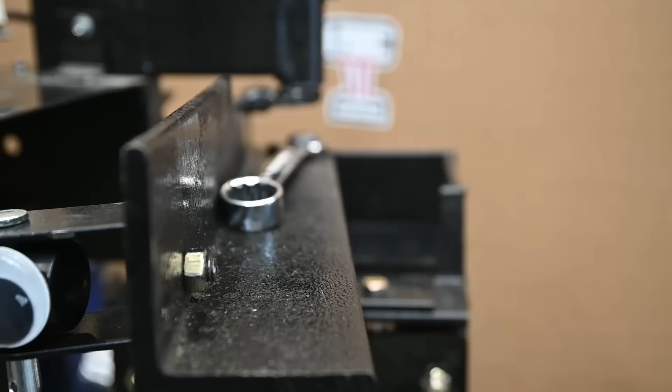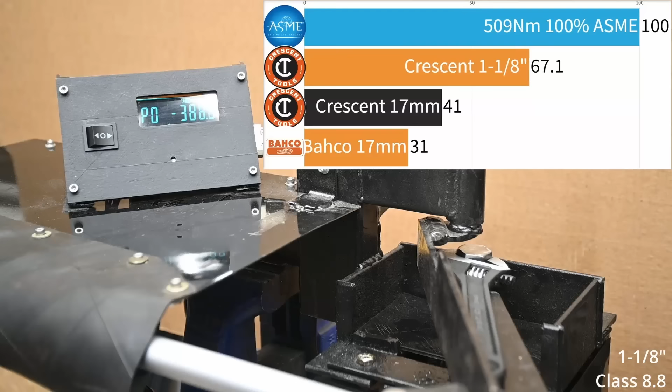ASME tool engineers expect 509 newton meters, 375 foot-pounds out of these tools. Today we see, can any of these actually do that? But mostly, a lot of the testing we do here is to measure slipping.

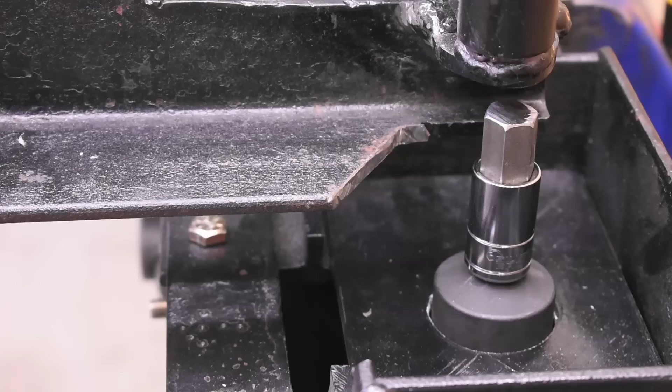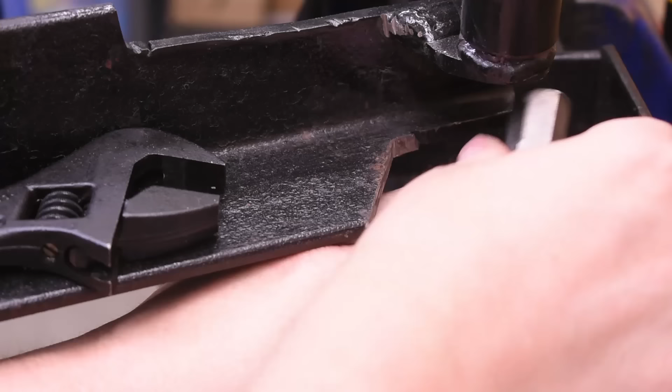Which tools slip first? Because this is the type of tool you might use on much thinner hexes than we're showing, that might be brass or less than perfect looking malleable iron, black pipe, and tie rods. The tool that makes it further before slipping is not top because you can put hundreds of foot-pounds behind it. It's simply less likely to spill blood from your knuckles than others when turning realistic looking stuff.

In that past video, and since you guys have asked us to look at a lot of different brands of adjustable wrenches, when we tally those up, sure, some of them might be sort of on the meme side of sick curiosity, but we figured even if so, that might be fun. And those include options made in the US, like old school Craftsman, and one purchased from Japan just to peek at the famed metric adjustable wrench, and representing another at bat for Bahco.

And also a few brands that, if you've been really out of the tool game for a while, you might think are US names, like Pittsburgh. Okay, that one's a stretch, but SK as well. Yeah, the rest of these are mainly made in China, but for less coin. Let's see where they fall. With 8 brands to get to, let's get into it.

Starting in order of price, we have Workpro, a $15 adjustable wrench. Expensive versus cheap was a common request, and this is towards the bottom here in available options. It's a 10-inch wrench like the Crescent wrench we've tested previously. This class of tool is segmented into common sizes, which often come with very similar jaw widths and ranges.

We'll point out when that's not the case on the ones we bought today, in which case they'll get dinged for overly chunky or awarded for being slim when they measure 7% or further from the current average. But yeah, one thing that can be annoying about cheaper wrenches like these is the jaw wiggle dance they do. In our minds, this does two things: possibly afford you less grip inherently, and we'll be testing that next, but also when using the tool, repositioning it a bunch of times.

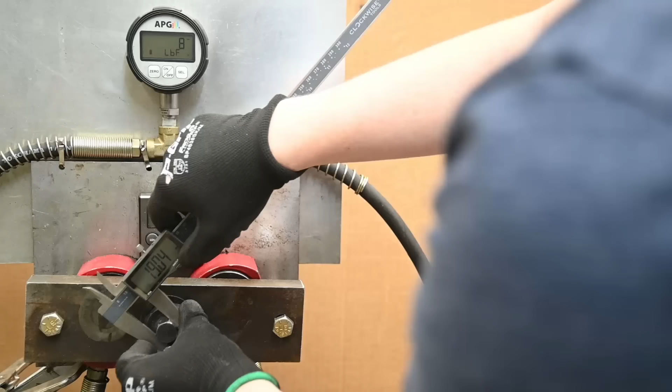The most annoying Crescent wrench is the one that shimmies open to a larger size when you're using it. And I often say Crescent interchangeably with adjustable wrench, but it earns the label here being really poor at this.

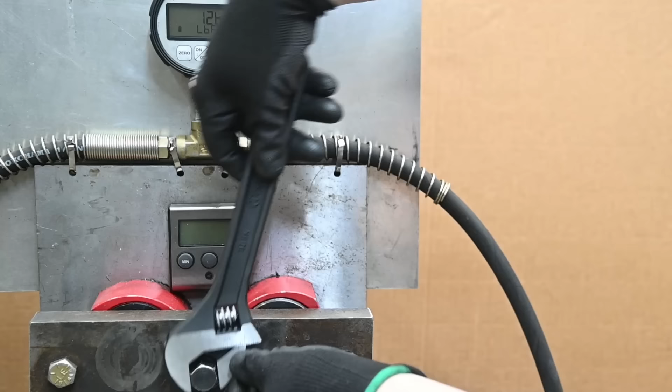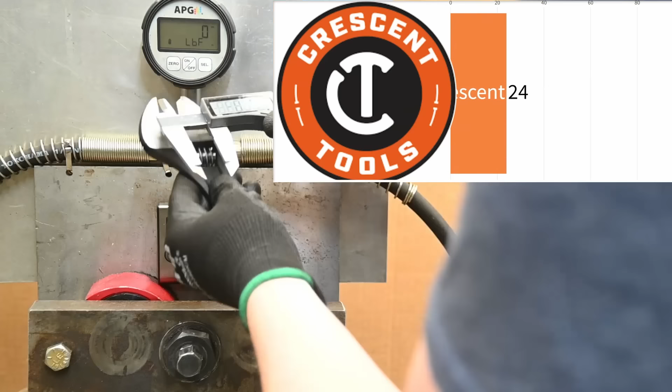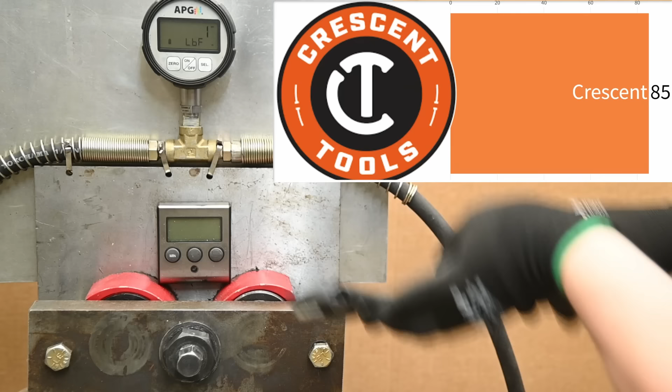With the calipers zeroed at the 19mm hex coming off the head of our reverse thread test bolt here, the bolt is tightened up to about where we can, then loosened, repositioning it the same amount of times each. And for the Apex Tool Group owned Crescent made brand in Vietnam, that's 0.85mm over. Not good. You're aiming for 19mm, and in short order, you're going to have in effect a 19.85mm wrench. And removing the link to this tool from our last visit on the subject, it's that bad.

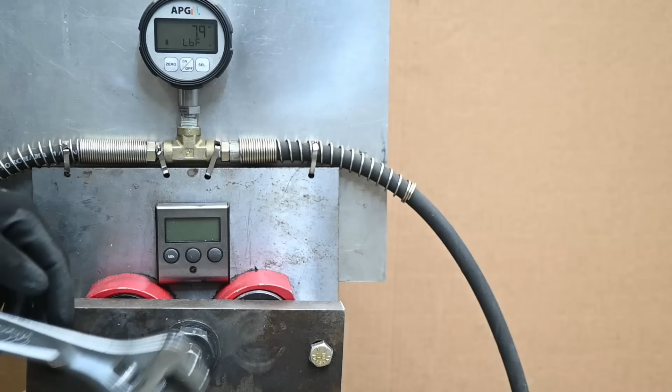The Workpro, well, it's better, but it doesn't feel all that solid. You know the feeling when the jiggle creeps in if you use these. 0.38, or 19.38mm when finished.

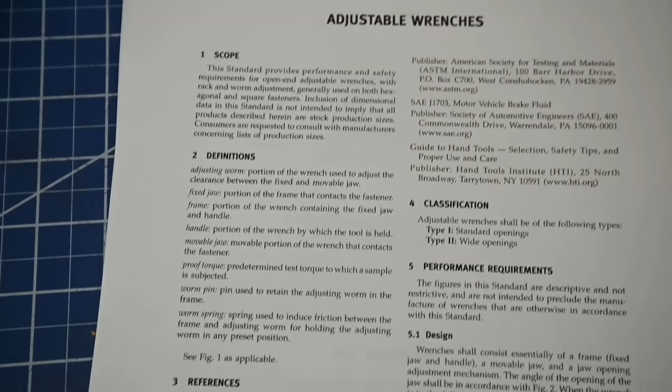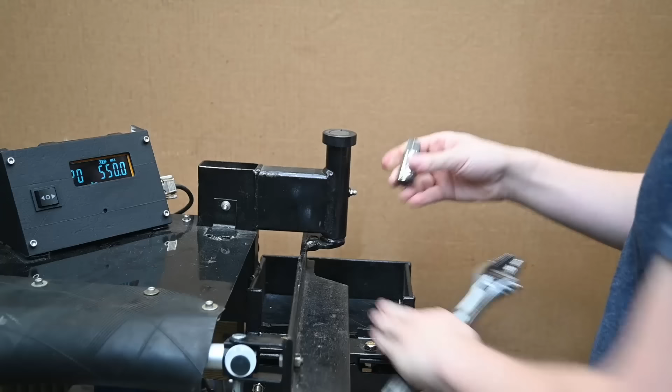According to ASME design standards, a 10-inch class of adjustable wrenches should be exceeding 508 newton meters, 375 foot-pounds before breaking, which is crazy. But also the rock hard large test hex this is designed to work on is mainly just to break these. We'd rather work up to that on a class 8.8, grade 5 equivalent hex hardware, and eventually ruin them as we move up to larger sizes to see which slips before others.

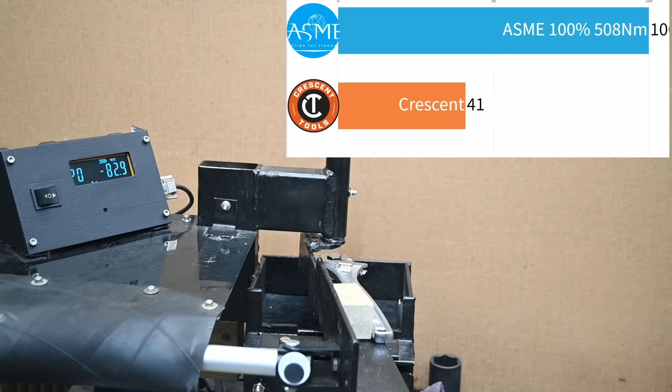So that's with a 17mm hex here first. Often larger wrenches don't like smaller hexes in my own experience. Depending on the angle of the wrench head, many of these are going to require wood cribbing here to offset them correctly, but all the torque is measured here up at the head.

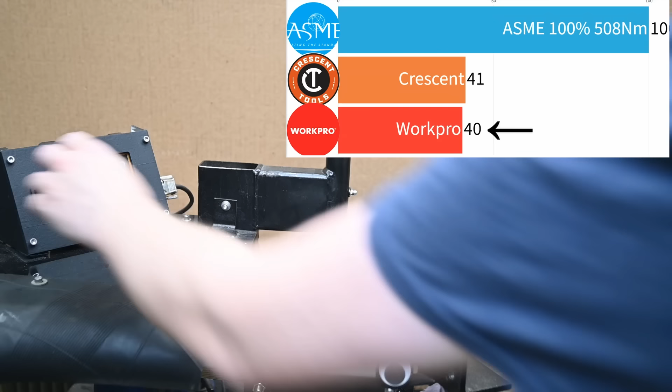And for the Workpro here, that's 201.9 newton meters, or 40% of the ASME design standard, before rounding and slipping off what you're working on here. About the same as the Crescent. Let's see if that's any good.

Up next is SATA at $17. No one requested this, I'll be honest, but I always see this brand around. Reminds me of SATA, the spray guns, but this one's owned by Apex Tools like Crescent is, though in person they do look much different.

The fit and finish, including this rust forming on it, leaves some to be desired. Moisture is getting trapped into this paper backing and then oxidizing the ground finish on the handle. And for your troubles, you're left with some easily moving jaws with the same amount of work done here.

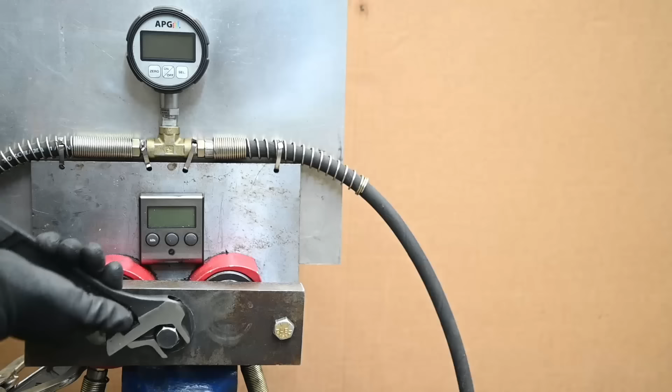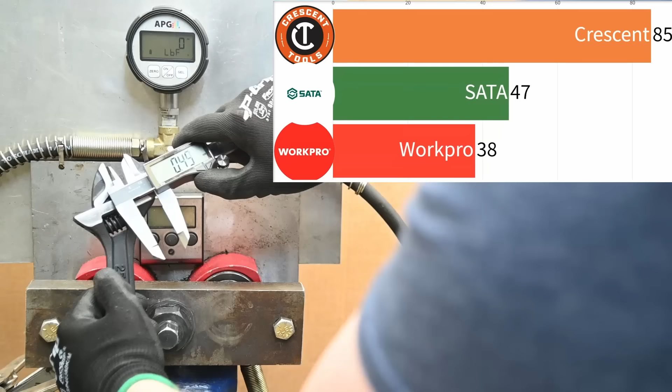It quickly feels like a new size, though less here than the other Apex Tools namesake, 19.45mm becoming the wrench size after snugging in onto the 19. All these so far feel pretty loosey-goosey.

It's when we get to that grip on a 17mm slip test that we really get to see more poor performance from the SATA. 138.3 newton meters, just 27% of the standard before slipping, a new record low.

Moving on in price, next we have one of the most requested models. Here at $18, we have the new Pittsburgh extendable knuckle remover 5000. This isn't like a 10-inch adjustable wrench. It's more like a 10, 12, 14, or 16-inch wrench, and its jaw size and range reflects that. They are 22% fatter than average.

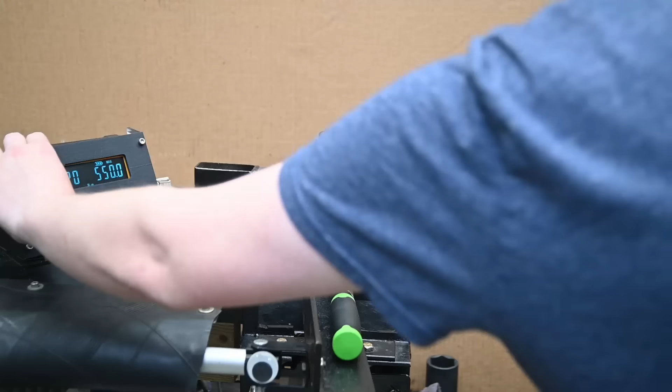That isn't going to be a clean comparison, but you guys were curious as well, so we are too. Theoretically, as a heavier, bigger wrench, it should run away with things as we progress to larger hex sizes, but on smaller stuff, I try not to use something too large for a reason.

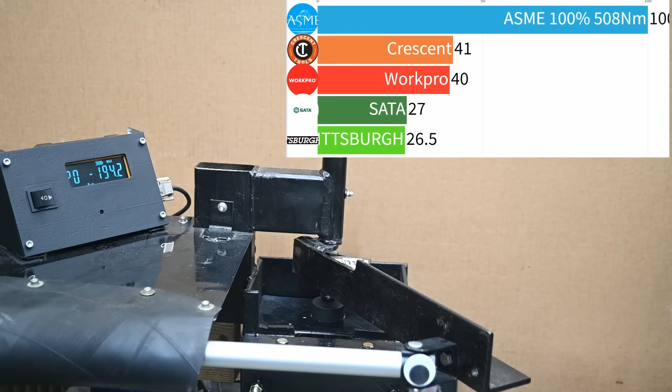We see 194.2. That's not amazing, but not terrible, 38% of the standard. Though we did find the slop in the jaws here results in just 0.21 millimeters over, so it may have some potential. We'll see coming up.

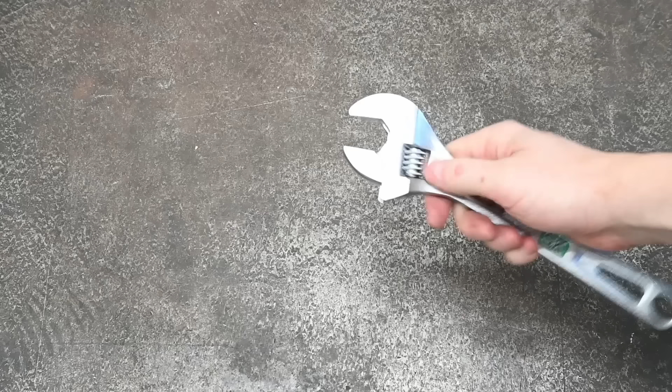And jumping up to $24 now, we have SK. The only time SK has made appearances on this channel, it's been their USA stuff. SK has since been bought out by Great Star out of China, and people aren't happy about that. Pretty much all the one-star reviews about this tool are about the fact that it's not made in the USA like most classic SK is, which I do get. But also, maybe it sucks, maybe it doesn't. Its shape is a bit reminiscent of their X-frame wrenches.

It's also got some jaw movement they should probably address. Doesn't feel as loose and wiggly as some of the others, but when in use, the jaws open 0.56 to 19.56 millimeters. Not a good stat to be towards the top in.

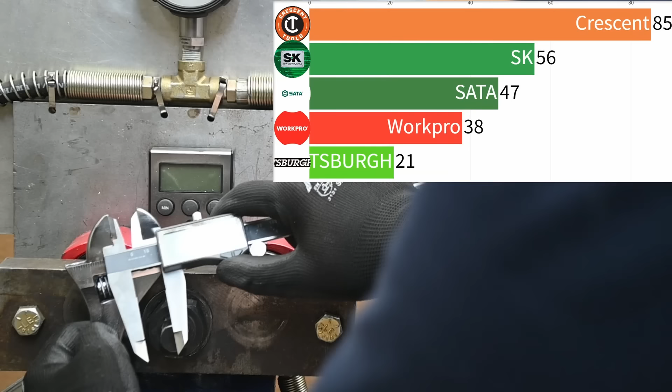When it comes to jaw performance, when you snug it onto something in order to break it free, it's not bad though. It's going to get 203.6 here, which is slightly above the Workpro, but still matching it percentage-wise with 40%.

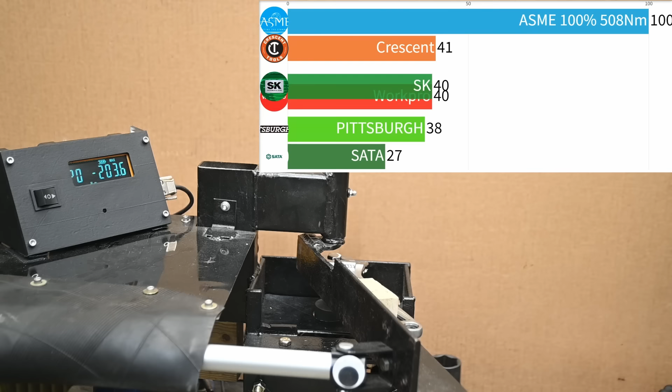Okay, and up next we have Tekton, often a great choice for middle-of-the-road pricing, but usually above middle in performance. Here with a price of $25 though, putting it in the upper half of tools, and this was made in China. Was hoping to see a Taiwan example for us today, as most of Tekton's stuff is, but we failed a bit in that effort.

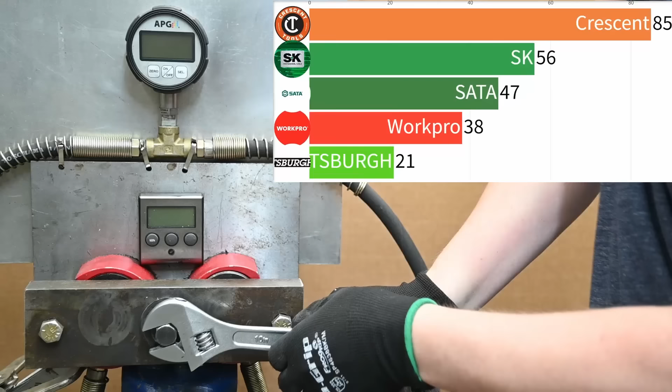Regardless, it feels like a solid piece here, and the jaws open with just 0.16 millimeters worth of slop, the best of the purchases so far today.

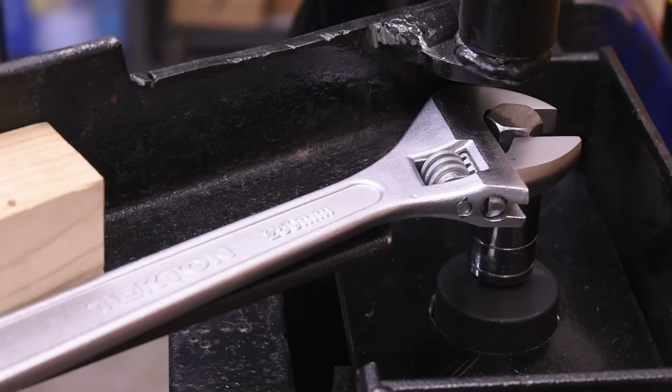It also takes a fair amount of turning for it to round over a grade 5 type hex. Keeping in mind this is likely thicker, wider than the hex you're going to be tackling in real life, so rounding might happen at lower torque levels for each of these we show here, but apples to apples it does pretty well, 211.5, 42% of the standard.

We may not have a classic USA-made SK, but we do have a classic USA-made Craftsman, the most requested example to compare our results to.

No way to buy a new one of these any longer, but I have a rather full assortment of Craftsman from days past around here, and this is their 44604 10-inch model, which should play the part, and adjusted for inflation would be about $29 today, roughly.

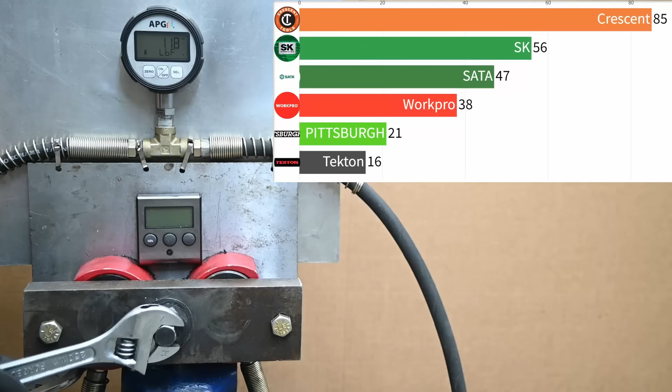If you're ever using a Crescent wrench and it just won't stay the size you adjusted it to, I'm curious if that's an old wrench like US, Swedish, or otherwise, or something made in the modern era. Because for example this US click stop is one of my personal favorites to use for this small size because it stays essentially at zero slop, and even this USA Craftsman, which doesn't advertise a set and stop function, just doesn't open much at all. 0.06 millimeters is essentially no bigger than where it started.

That's good stuff. And while it's not by a mile, it also impresses on the 17 millimeter here, racking up 221.9 newton meters for 44% and the top spot.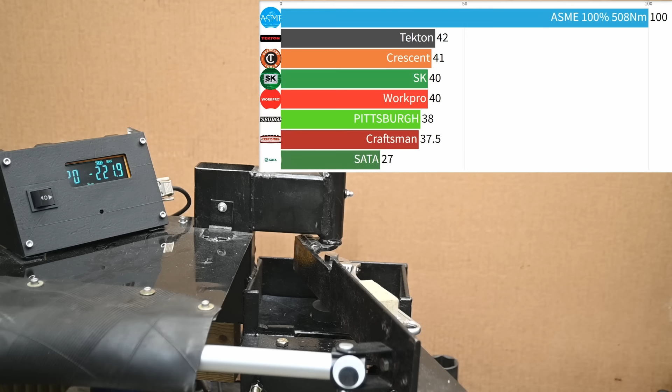Craftsman came to play, it seems, but also not the only US option we brought. Coming up at second highest in price for a full $50, we have this made in the USA Klein spud wrench, which is a type of adjustable wrench. And usually they have very few downsides, at least in my experience. I found myself using this type of design in plenty of scenarios.

They have a tapered handle, which usually means the wrench head itself is smaller per handle size. Like a 10-inch spud wrench would usually have the head of an 8-inch Crescent wrench, but this Klein, they make the head larger to match, which is nice, and even go a bit overboard.

The jaws measure 20% over average in thickness from all the examples so far, and it will get dinged a little for that. The tapered handle allows for easy use with a cheater pipe, or snipe I guess it would be called in this case, and they even include a through hole at the top, which would be missing in the handle for a lanyard.

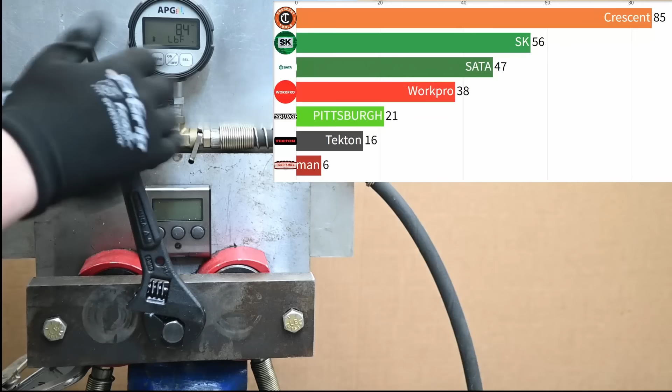It's pretty handy, and handy it's going to remain for you after getting banged around. You're not going to be chasing this one's jaws, reining them back into size all the time. I apologize for the glare, but this came in at 0.05 millimeter, damn good and about matching the Craftsman.

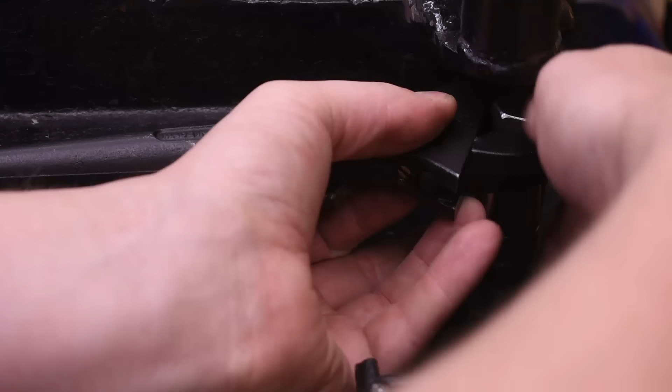Just like we saw with the large jaws on the Harbor Freight, working on somewhat soft but typical smaller size fasteners, it might favor a similarly not so large wrench, as we see the same phenomenon here for whatever reason, just 166.2 newton meters before it loses grip on the 17 millimeter hex.

And here we have Bahco. This is its chance at redemption. The brand known for having been the first with an adjustable wrench did very poor for us last time, and that was even buying 2 examples to look at.

We couldn't find any Bahco Swedish examples for sale, so we bought the most expensive, $56, in this case a 10-inch model we could find that appears to be a foreign market tool, as it only graduates metric measurements, no SAE on the other side, which is blank.

Finally found a metric adjustable wrench. We bought this from Japan. It arrived fairly quickly. It still says made in Spain on it, so we may have just spun our wheels a bit trying to find a new country of origin for Bahco with no dice. Though it does feel very nice.

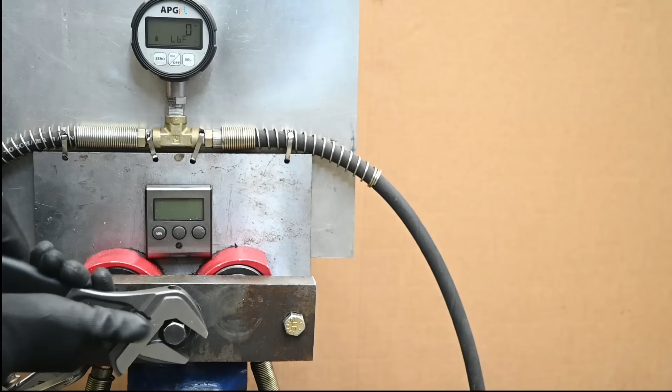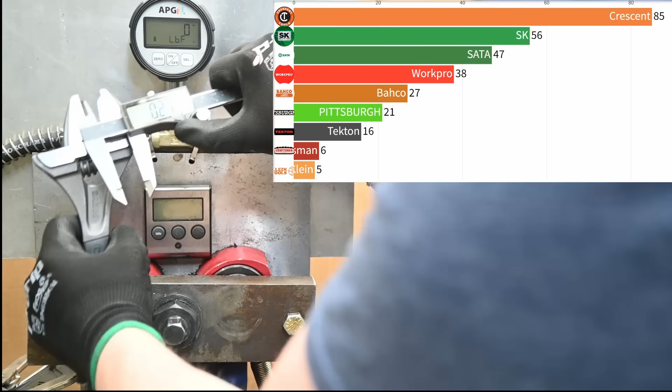The jaws taper narrower but start wider at the bottom, so still fall into the overall average jaw width range. And use of the tool netted us 0.27 millimeters over after the same amount of swings and torque applied. Not bad. 201.8 is what we get out of this wrench, which is not going to be record breaking, but so far that is 40%.

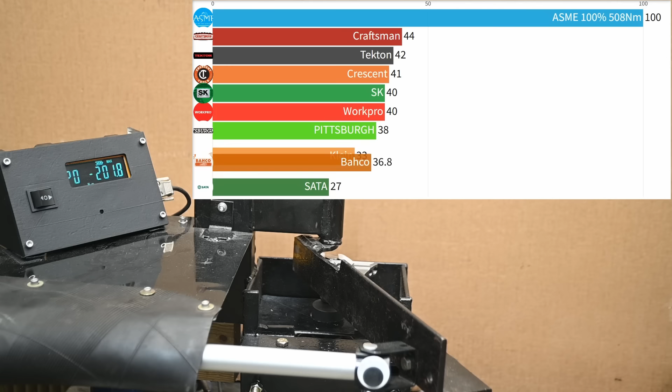So for all the wrenches so far, that looks like this. Getting dinged here a bit for the jaw loosening up during use, which is annoying, and here for the jaws being wider than average, which can also be annoying when they don't fit in many places.

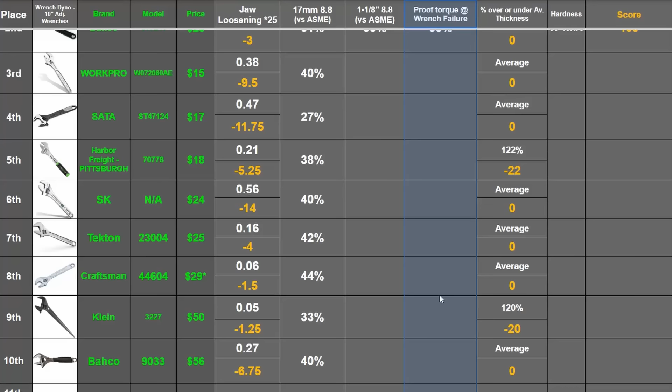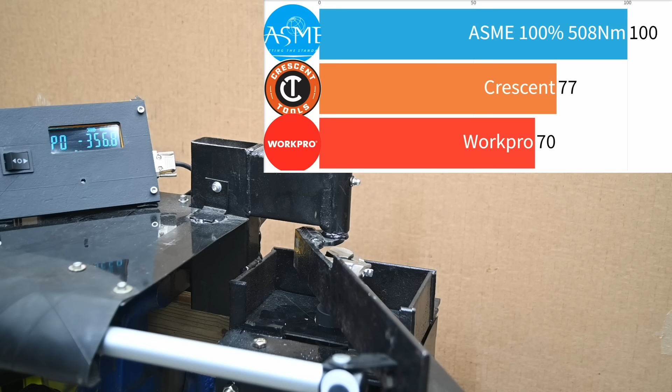In these tests is where we start seeing some bigger gaps forming between the tools. So Workpro manages to increase its wrenching ability from 40% up to 356.6 Nm, or 70%, with a larger fastener. Still not topping Crescent, but also amazingly not broken yet either.

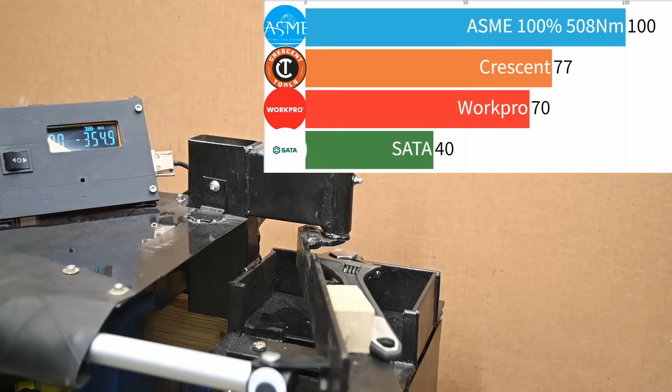It says chrome vanadium right on the side of the wrench, which typically, if they have to advertise the material forged into the side of the tool, they aren't bringing a lot in the reputation category. The SATA is going to just about match that same value with 71% or 358 Nm, but this is where the similar sisters call it a night for the rest of the showing.

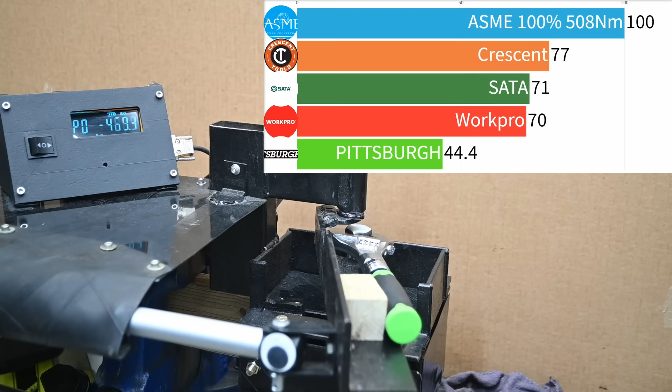The large and in charge Pittsburgh does as you'd expect or hope, being a larger head, sort of 12-inch plus class of adjustable, but still impressive to see it not do terribly. A lot of utility in this tool for 18 bucks, 527.9 Nm or 104%. The first to eclipse the standard, but though that standard doesn't really apply to this size of tool.

The SK surprises. I was ready to talk about what happens when US companies sell to massive foreign corporations, but that'll have to go on the back burner with 429.9 Nm, 85%, and it's still working. It's looking okay. For every yin, there's a yang.

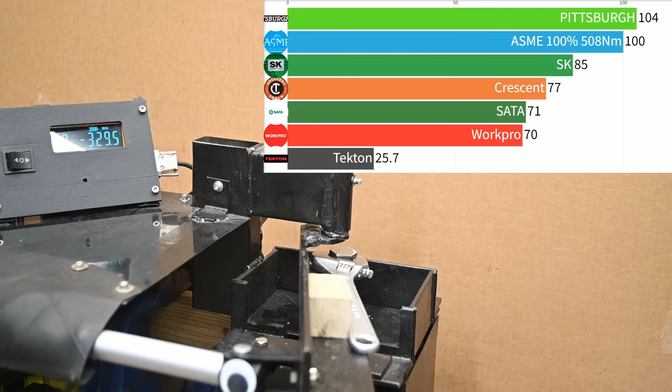The Tekton, which is the most expensive out of the made in China options, is able to muster 373.4 for 74%, which isn't super bad or anything, but it's also the first, but won't be the last wrench to retire from this test. It's now in a stuck position, won't adjust either way, and won't have another shot at a higher score. Craftsman is next. Here's that.

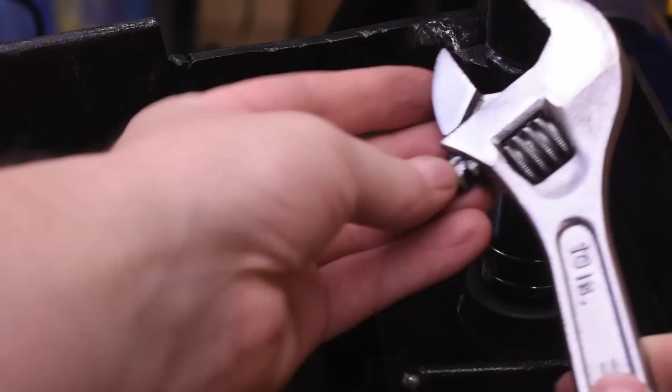So my Craftsman met an unfortunate early demise at 332.6 Nm. The adjustable jaw broke clean off, and it appears to have broken down the spine, which does measure about 20% thinner than most of these here. Off to the great toolbox in the sky, in the name of science.

The beefy Klein, on the other hand, is happy to see something larger to tackle and takes it head on, putting up the largest numbers of a 10-inch wrench on the day so far, 431.4 Nm, but that does round to the same 85% up top here.

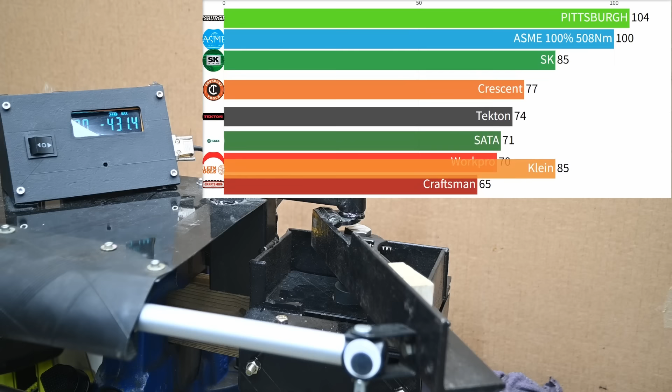Still works very smoothly. Not to be left out, Bahco wants a piece of the action and also targets the same sort of wheelhouse of torque here, 426.4 or 84%. Though that was enough to retire it. This thing is frozen up real good, like even a hammer and pliers won't free up this thumb screw. Bahco steps out of the race a bit early.

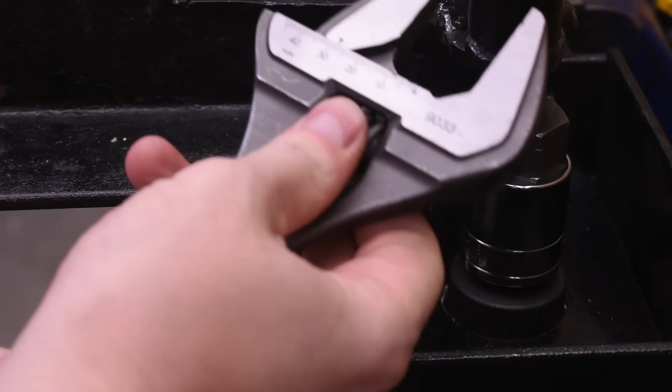Which means the super hardened 19mm hex is going in here. There's a few tools who will be missing from this round from not lasting long enough to experience it.

The $15 Workpro manages to not be so used at this point that it can't improve its score, and that makes it increase from 70 to 74%. It's a lot like a standard Crescent wrench.

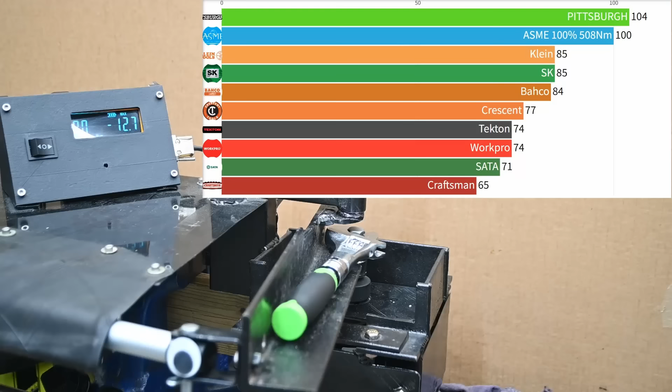Similar story for the Pittsburgh in that it also is not able to improve. It prefers larger hardware given its larger frame, but not bad, 501.5 here, down from 528, and it's also not broken, still seems to work after getting its battle scars here.

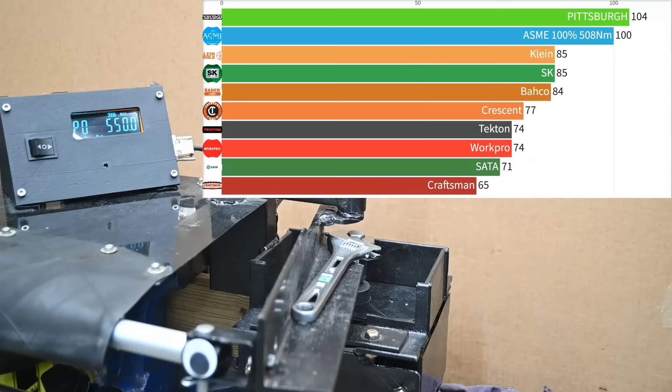SK has been impressive on Pushy today. It's able to match or just slightly increase its peak torque here by 1 Nm for the same 85%, unchanged, and also one of the few still working at the end of the day. Gotta say, I didn't call that.

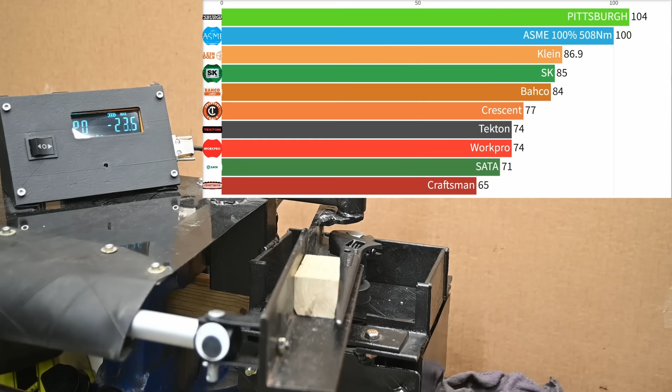And the last wrench to make it here, all the others bowed out before this Klein, it's not playing around. You won't always or even often be on a fastener as solid and unwilling to round over as a hardened hex to ASME standards, but if you ever see something similar like grade 8 or above, this wrench will top every other here by not a small amount.

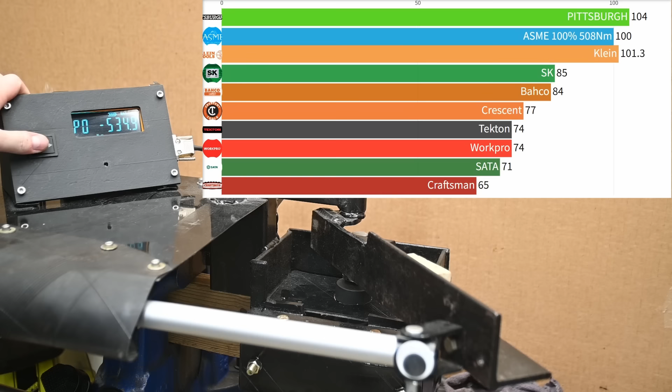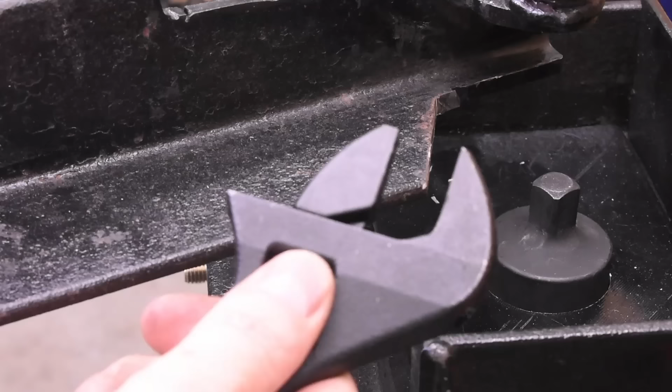552 is the max the digital output is set up for here, and so that's where it's going to get turned off, but it will still exceed 100% for the first time we've seen out of any 10-inch adjustable. It took some spending and some thick boy jaws to do it, but it's having no trouble still operating as usual after all this as well, completely unfazed. That is good stuff. And that also looks like all of this.

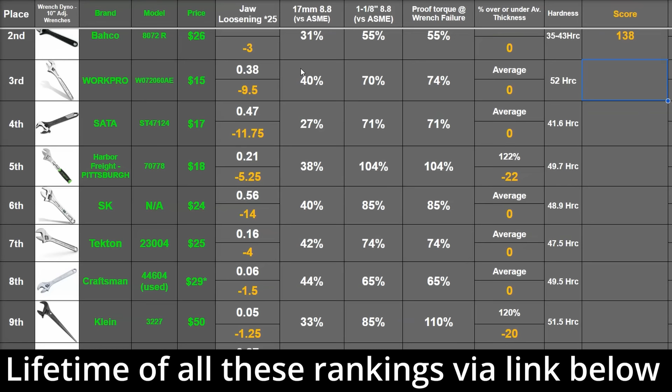If you add how all these performed with these percentages of ASME standard as points across here, that totals 174.5 for Workpro, SATA 157 and a quarter, that's not great, 218.75 for Pittsburgh, SK 196, Tekton 186, Craftsman bowed out early, so had less of a shot at a high score, 172.5, 206.75 for Klein, and 201.25 for the metric Bahco. Which, just first glance here, the Pittsburgh numerically gonna be on top, which is to say, it doesn't suck.

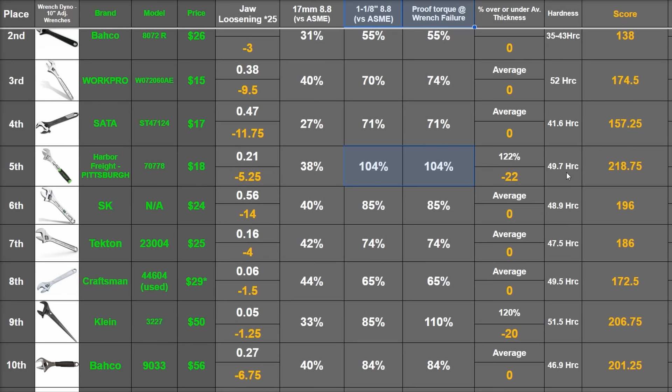If you have fasteners 3/4 of an inch and up and you're targeting those, this thing will work well, and I even like extendo ratchets, so why not an extendo knuckle mutilator? Not mad at it, but won't be going on our 10-inch adjustable wrench ranking here for obvious reasons, which leaves...

Klein in first with 206.75. With those jaws and a similar boat, prefers 19mm, 3/4 inch and above, which is, as a spud wrench, probably not usually a problem. I see a lot of larger stuff that this would be useful on, like air and hydraulic lines.

The Bahco, which just did well all around, including some smaller stuff, much better than their 8072R model. At least that thing is quite rough these days, and surprisingly, SK, if they work on jaw fitment, this could even compete with the higher ones towards the top here, but all said, is a wrench that doesn't easily slip off a bolt head and is still alive and kicking today.

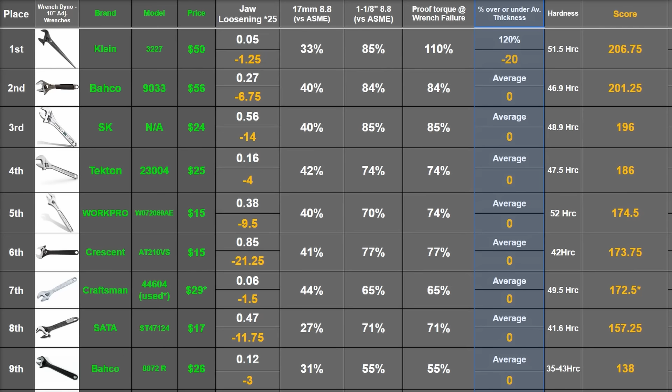With this list, you can pick the attribute that's most important to you and see which did best. That's how we recommend looking at most of these. Now, not all of us are going to be as strong and consistent as Pushy, but when your hardware doesn't look as perfect, doesn't look as thick, or as hard as what we test, some of these might afford you a better chance at not applying a blood undercoat treatment to the bottom of your vehicle when you're working on it.